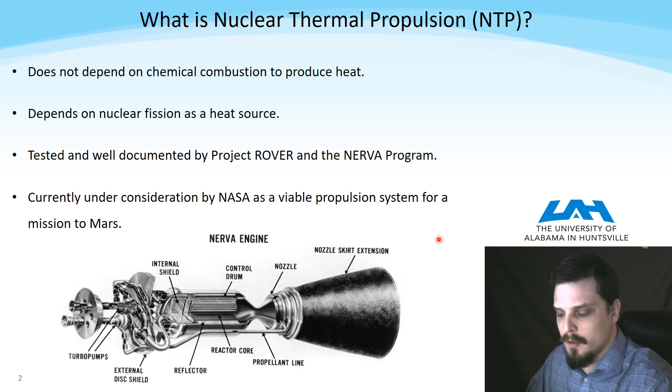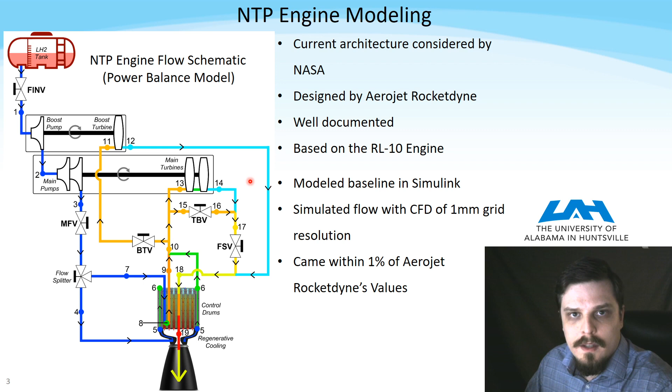Currently, Aerojet Rocketdyne is working on such an engine, and we can see the power balance model here. UAH has a Simulink model of this engine, and it is within 1% accurate of Aerojet Rocketdyne's values.

So what's wrong with pure hydrogen propellant? It is lightweight, which means you're going to have low vehicle mass. It has low molecular weight, which means that the engine will produce thrust at high specific impulse. The cons of this propellant is that it has low density, which means your vehicle is going to have large propellant tanks, high specific heat capacity, which, although is great for removing reactor heat, it is not so great when we want to heat up this propellant.

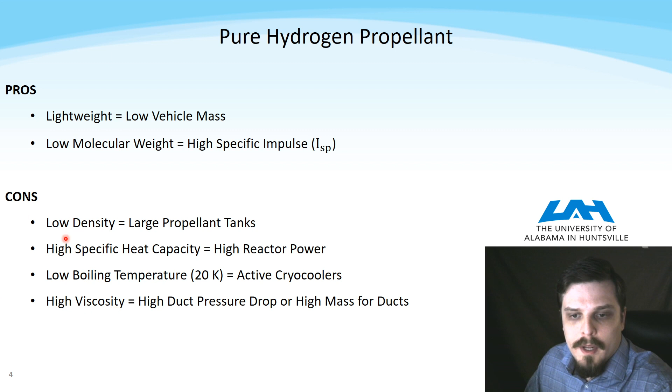It also has a low boiling temperature of 20 Kelvin, which could mean that we're going to need active cryocoolers. This is an area of research. High viscosity, which means we're going to have some high duct pressure drops, and this is due to the fact that the propellant has low density, which means we're going to have high volumetric flow rate through those ducts.

So why are we considering seeding hydrogen first of all? Well, seeding is a process of adding an impurity to a base fluid to alter the thermophysical and transport properties. Synthetic car oil is seeded with solid nanoparticles of metals, which enable it to more effectively take out the heat from the car engine. But solid particles will congest the fuel element channel of the NTP engine, and we're also not considering molecules with high hydrogen content such as methane and ammonia because we're going to need to be breaking those bonds by thermal dissociation.

And why are we doing it with heavy noble gases? Well, they are non-reactive. They have very low specific heat capacity, and most are very dense. The noble gas of interest in this study is argon due to its easy accessibility and low cost.

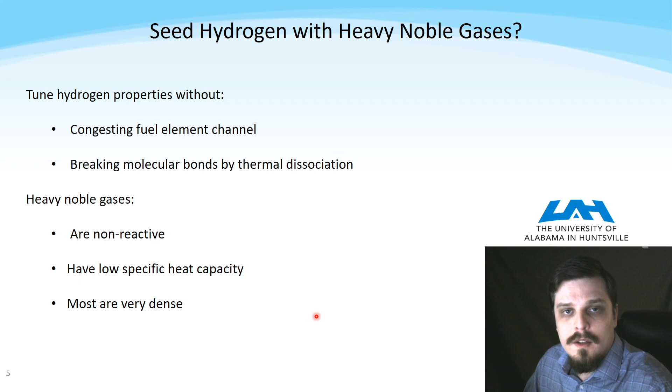So here we can see how the seeded hydrogen properties change with the argon molar concentration. We can see that the density increases, the specific heat capacity decreases, while the viscosity and thermal conductivity increase and decrease respectively at much lower rates than the density and specific heat capacities. And these two are the properties that we are most interested in for our pressure losses and convective heat transfer.

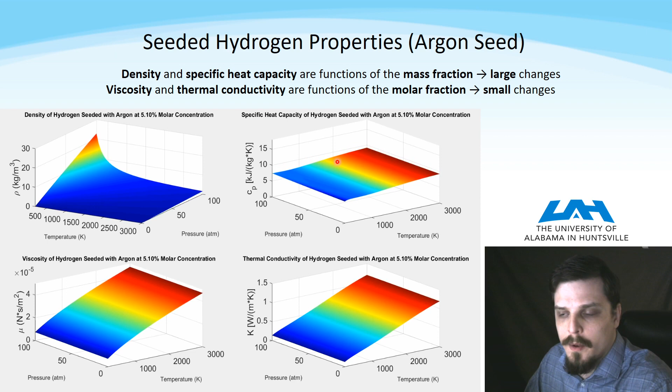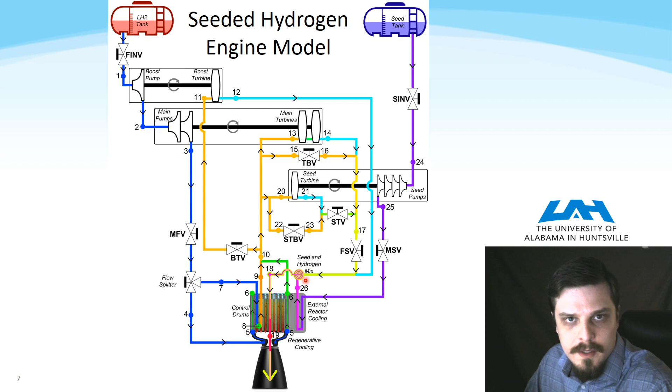In order to seed the hydrogen, we need to add some hardware such as a turbine circuit to power the seed pumps. And this seed is going to need to get some of its heat by cooling the external of the nuclear reactor. And then it will be mixed inside a T-valve, and because these two fluids are at supercritical phases, supercritical fluids are completely miscible with each other, so we don't need any kind of mechanism other than the said T-valve.

So the convective heat transfer increases, and we can see this with the delta T between the channel surface temperature marked in green and the bulk propellant temperature marked in blue. This difference is seen to decrease here at the maximum seed, such as 6% molar of argon, while the maximum fuel temperature remains constant. We also observe that the outlet temperature from the reactor is increased slightly.

However, we do require an increased reactor propellant pressure, but this is more than made up by the decreased pressure drops throughout the turbomachinery and ducting due to the higher density of the propellant.

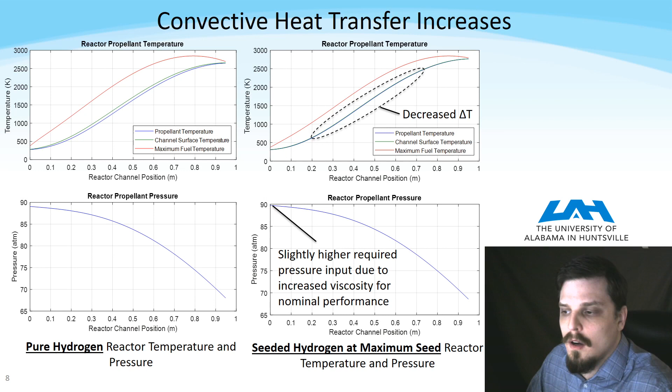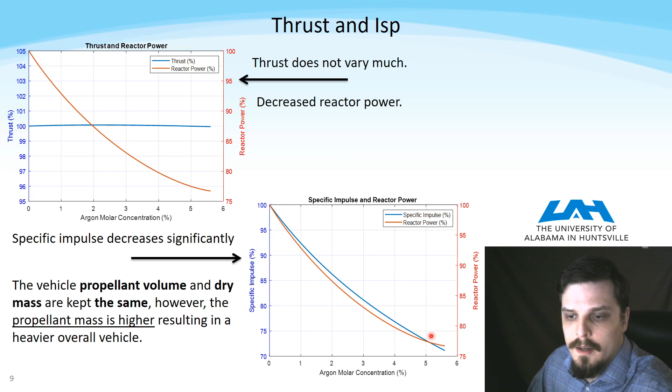The vehicle performance, however, is increased, as shown here by the delta V, with the gray area being the expected vehicle performance, as indicated by the design space. And this increased delta V can be translated to reduced travel time up to 10%.

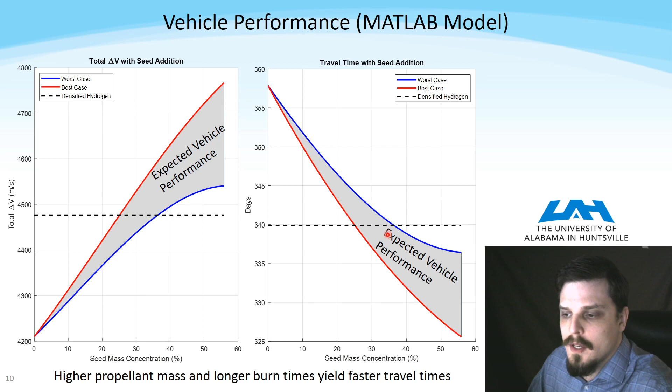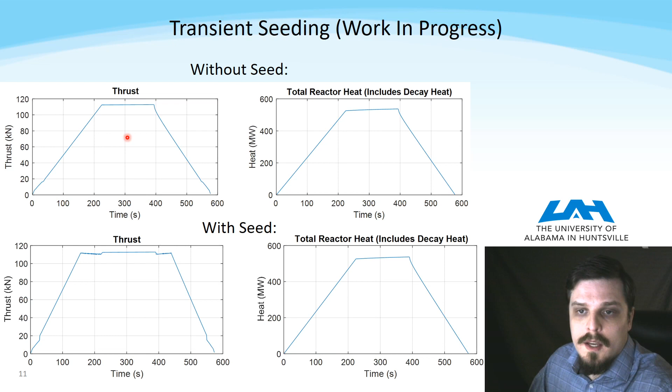It can also be used to widen the thrust band during reactor transient events. So as the reactor heats up, we can start seeding in this area, and we can get a wider band of the same thrust as shown here, whereas with the case without the seed, we see that the maximum thrust actually follows the reactor curve.

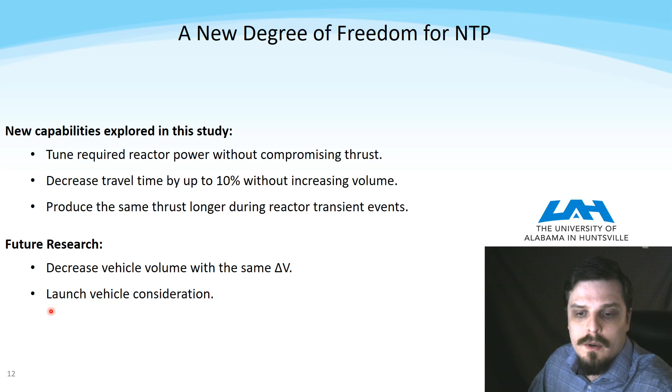So today we have discussed seed as a new degree of freedom for NTP engines. We can tune the required reactor power without compromising thrust. We can decrease the travel time by up to 10% without increasing the volume, and we can produce the same thrust longer during reactor transient events. Future research will include decreasing the vehicle volume with the same delta V, and also launch vehicle consideration due to the increased mass of the vehicle.